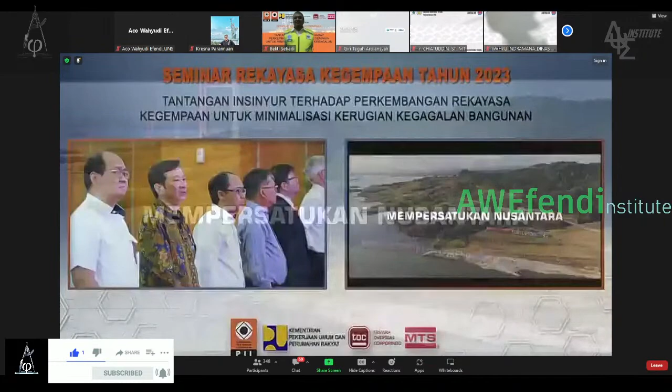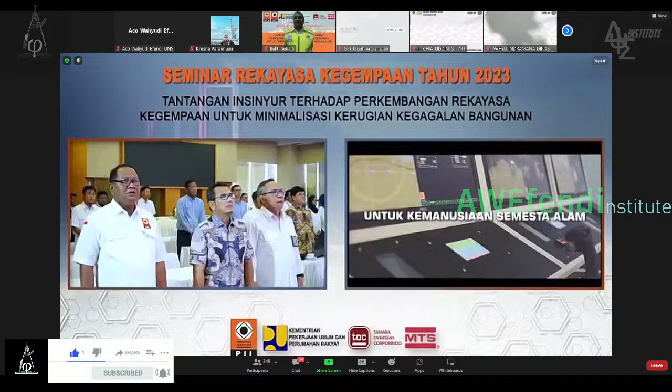Kami Insinyur Indonesia berbudi luhur dan berintegritas, kompeten dan profesional, bertanggung jawab sepenuh hati. Kami Insinyur Indonesia, kami menerangi negeri, mempersatukan Nusantara, membuka cakrawala dunia. Kami Insinyur Indonesia, kami memajukan bangsa, mensejahterakan masyarakat untuk kemanusiaan semesta alam. Kami Insinyur Indonesia, siap membangun bangsa.

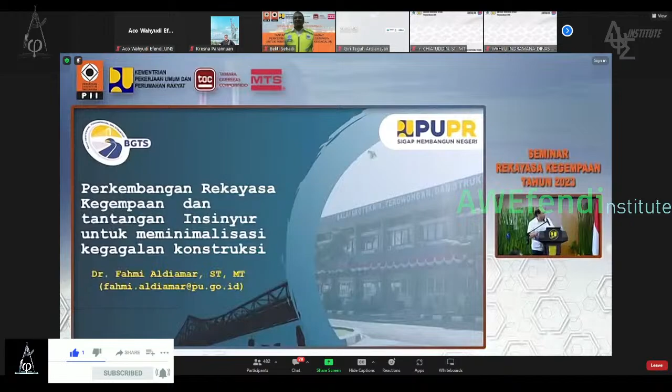Baik, yang ingin saya sampaikan di sini adalah lingkup-lingkup terkait dengan kegempaan, tantangan kita ke depan, dan standar ataupun pedoman yang sudah kita miliki sebagai panduan bagi rekan-rekan semua, terutama di keinsinyuran, dengan harapan bahwa dengan meningkatnya kapasitas ataupun kemampuan SDM kita, otomatis bangunan ataupun infrastruktur kita juga akan lebih handal.

Baik, Bapak Ibu sekalian, ini adalah hal yang sudah menjadi pertimbangan kita semua. Dalam artian pada saat kita bicara kegempaan, maka kondisi alam ini yang harus kita hadapi. Jadi kondisi tektonik kita di sini cukup kompleks. Secara umum ada 4 lempeng yang bergerak dan masing-masing memiliki laju pergerakan yang cukup tinggi. Apabila kita lihat di Indo-Australia, lempeng itu menunjam ke arah lempeng Sunda kurang lebih 6 cm per tahun.

Jadi akan ada akumulasi energi setiap tahunnya akibat pergerakan tersebut, dan suatu ketika apabila energi itu terlepas maka gempa itu akan terjadi. Ini adalah lempeng-lempeng utama yang ada di sekitar Indonesia yang juga mewarnai kondisi kegempaan di kita. Dan apabila kita lihat, ini adalah data-data kejadian gempa sebarannya di seluruh Indonesia. Jadi kalau kita lihat, hampir seluruh pulau yang ada di Indonesia ini tertutupi oleh data kejadian gempa.

Ini menunjukkan betapa kita harus sudah mulai berpikir bahwa infrastruktur kita harus lebih aware ataupun lebih tahan terhadap kegempaan tersebut. Kita harus mengantisipasi hal-hal yang sudah tidak mungkin lagi terelakkan. Jadi kegempaan ini adalah hal yang pasti terjadi. Kapan, kita tidak tahu, tetapi secara historis, 100 tahun ke belakang apabila kita plotkan datanya, seluruh kondisi yang ada di Indonesia ini tertutupi oleh kejadian gempa tersebut.

Apabila kita lihat juga, ini adalah data kejadian bencana yang ada di Indonesia dari tahun 2005 sampai 2014. Apabila kita lihat ke tahun 2023, ini juga akan meningkat. Jadi dominannya, 31% runtuhnya bangunan itu akibat bencana gempa bumi. Ini mungkin tadi sudah disampaikan oleh Bapak Staf Ahli Menteri bahwa memang betul kejadian gempanya tidak mungkin kita elakkan, tetapi bangunanlah yang akan menjadi penyebab terjadinya fatalities atau korban jiwa. Jadi kondisi struktur bangunan kita ini apabila tidak kita perbaiki, akan berdampak lebih lanjut terhadap kematian ataupun korban jiwa. Kemudian 5,2% kematian ini akibat dari bencana gempa bumi, baik itu dari tsunami ataupun bencana lainnya, terutama likuifaksi.

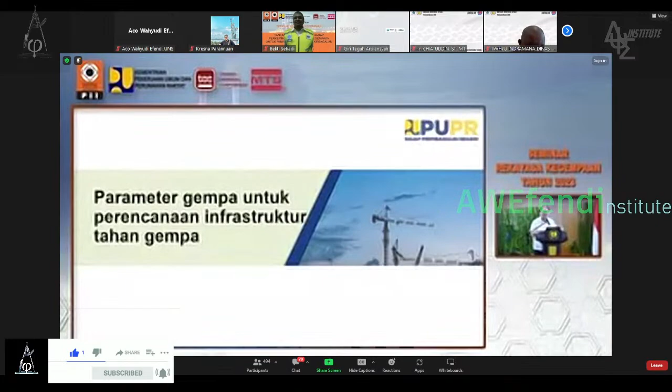Kemudian ini adalah lingkup yang ingin saya coba share. Jadi secara konseptual, apa yang ada di SNI, apa yang ada di standar yang sudah kita bakukan, ini kita harus mengetahui apa itu parameter gempa untuk kebutuhan perencanaan.

Kalau kita lihat kegempaan ini, kita sudah tahu pasti akan terjadi, tapi kita belum tahu di mana dan berapa besarannya. Jadi kita belum bisa melakukan forecasting. Mungkin di luar negeri pun belum bisa melakukan sedetail atau seefektif itu, sehingga kita sudah sama-sama meyakini bahwa kejadian gempa ini tidak dapat dicegah.

Sehingga kalau kita bicara bahwa fatalities harus kita kurangi, manusia harus kita lindungi, ini mengacu pada FEMA, kita harus mengidentifikasi sumber gempanya. Ini sudah dilakukan oleh Pusat Studi Gempa Nasional, sudah kita coba petakan di mana sesar-sesar aktif yang ada di Indonesia, contohnya seperti di San Andreas, harus dipetakan dengan persis di mana posisi sesar aktifnya, kemudian dibuat perambuan dengan tujuan jangan sampai kita membangun infrastruktur di daerah yang berpotensi mengakibatkan kerusakan, baik itu bangunan maupun korban jiwa.

Kemudian tsunami ini adalah bagian dari efek gempa, otomatis kita juga harus bisa memetakan zona mana saja yang rawan terhadap tsunami. Kita tidak membolehkan adanya bangunan di situ, atau kita harus mengantisipasi dengan bangunan-bangunan yang bisa menahan terjadinya tsunami atau mereduksi dampak akibat tsunami tersebut.

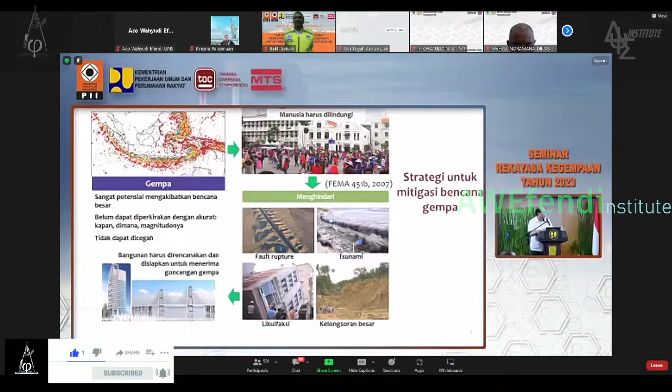Nah, ini yang menjadi dasar mengapa kita harus membuat bangunan kita tahan terhadap goyangan gempa.

Kemudian kalau kita lihat di sini, ada beberapa kondisi di mana terjadi kerusakan pada bangunan, terjadi kelongsoran, dan likuifaksi.

Jadi pada prinsipnya, kalau kita lihat di sini ada suatu nilai parameter kegempaan, yaitu percepatan gempa yang memang harus diantisipasi pada perencanaan infrastruktur ataupun bangunan gedung yang ada di Indonesia.

Nah, ini biasanya kita mengkorelasikan dengan nilai A atau percepatan, mengacu pada hukum Newton kedua. Nilai-nilai percepatan ini sangat tergantung dari infrastruktur yang nanti akan kita desain.

Jadi kalau kita bicara bangunan gedung, ini terkait dengan tinggi dari bangunannya. Kemudian terkait dengan tanah, apabila kita bicara kelongsoran, ini sangat terkait dengan massa tanah yang nanti akan mengalami pergerakan. Dan apabila kita bicara kondisi likuifaksi, itu tergantung dari kondisi lapisan pasir jenuh air yang dapat memicu terjadinya tekanan uplift akibat potensi likuifaksi yang terjadi.

Kemudian ini juga isu lainnya terkait amplifikasi, Bapak Ibu sekalian, di daerah cekungan, terutama di daerah perkotaan yang cukup padat penduduknya. Contohnya mungkin nanti akan saya sampaikan di Meksiko, terjadi peningkatan faktor percepatan dari batuan dasar ke permukaan yang cukup besar. Yang awalnya kita mengira gempanya kecil, mungkin hanya skala Richter 6 atau 7, di permukaan bisa teramplifikasi lebih besar sehingga dampaknya ke bangunan pun bisa mengalami keruntuhan.

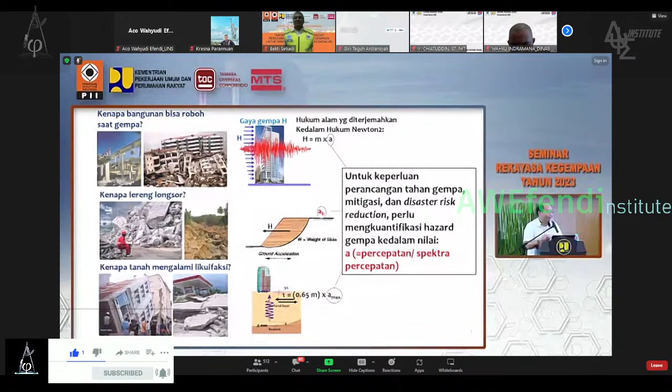Nanti akan disinkronkan dengan standar kita terkait gempa, baik untuk jembatan, bangunan gedung, maupun bendungan, dengan harapan bahwa seluruh peta yang nanti akan digunakan sinkron terhadap desain dari struktur bangunan yang akan kita bangun.

Kemudian untuk jembatan sendiri ada suatu hal yang signifikan. Yang pertama, ada seismic demand yang meningkat. Jadi yang awalnya umur rencana 50 tahun menjadi 75 tahun, sehingga otomatis dari segi kekuatan bangunan pun akan lebih tinggi dibandingkan dengan bangunan sebelumnya.

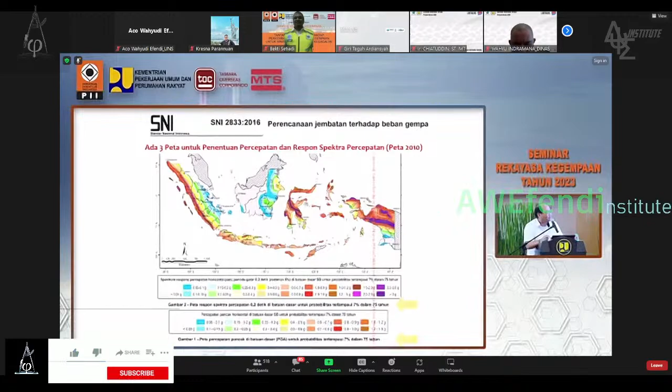Nah, ini adalah salah satu contoh peta-peta yang sudah dihasilkan, yaitu peta sumber gempa dan peta kegempaan, terutama yang dikeluarkan di tahun 2010. Di sini adalah yang untuk batuan dasar, kemudian di 0,2 detik, dan satu lagi di 1 detik.

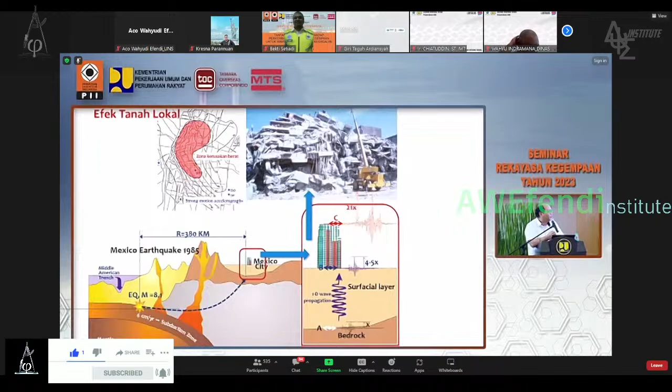Ini juga sudah kita coba antisipasi di dalam standar kita. Jadi apabila kita memiliki suatu nilai percepatan di batuan dasar, nah ini akan ada suatu faktor yang kita kalikan dengan faktor percepatan di batuan dasar, sehingga pada saat kita mendapatkan spektra desain di permukaan, ada faktor pengali untuk kebutuhan keamanan kita dari segi bangunan ataupun infrastruktur jalan dan jembatan.

Tujuannya adalah apabila kita melihat bahwa kondisi tanahnya adalah kondisi tanah yang khusus, maka faktor amplifikasi itu akan memberikan nilai margin keamanan supaya struktur atau infrastruktur kita akan lebih handal atau lebih aman.

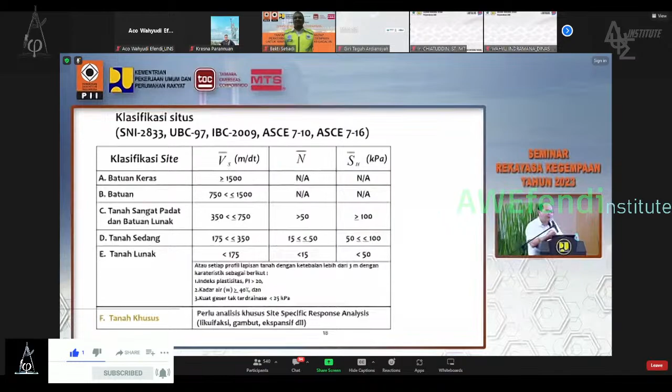Ini adalah kriterianya Bapak Ibu sekalian. Jadi kalau kita lihat ada kategori di mana kita bisa menentukan apakah itu kategorinya adalah tanah lunak, tanah sedang, ataupun batuan. Ini didasarkan dari hasil penyelidikan lapangan atau penyelidikan tanah, dan di situ kita bisa menentukan apakah kategori yang kita hadapi adalah kategori khusus atau tidak. Kalau kategori khusus, maka kita harus melakukan suatu analisis khusus supaya bangunan kita akan lebih aman.

Ini adalah salah satu contoh Bapak Ibu sekalian di Jembatan Kretek. Jadi apabila Bapak Ibu sempat mengunjungi ke sana, di sana sudah dipetakan ada sesar opak yang berada di daerah abutmen jembatan. Jadi di situ sudah diantisipasi kalau terjadi gempa di kemudian hari akibat gempa dari sesar opak, dimungkinkan ada kerusakan tetapi tidak sampai mengakibatkan putusnya ataupun terhentinya fungsional dari jembatan tersebut.

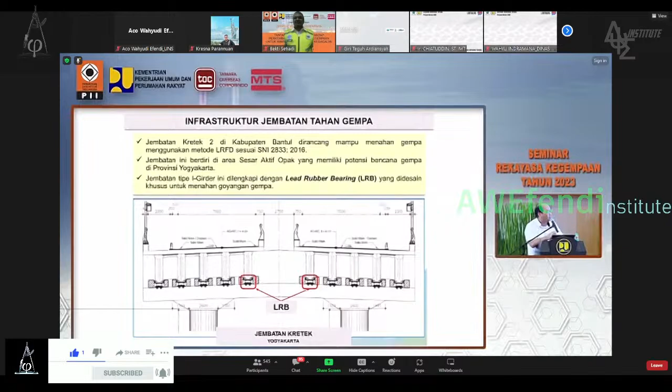Selain itu juga di bagian perletakan ini juga ada penggunaan isolation seismik, tim pergunakan LRB. Jadi jembatan ini sudah mengacu pada SNI 2833 2016 dan memang sudah ada penahan tambahan berupa isolasi seismik yaitu LRB. Ini mungkin sebagai gambaran Bapak Ibu sekalian bahwa LRB ini secara visual kurang lebih seperti ini.

Jadi ada karet di bagian dalam yang kemudian ada lead core-nya, ini berupa inti timbal. Tujuannya adalah pada saat dia mengalami goyangan gempa terhadap horizontal, maka timbal ini akan mengalami panas sehingga dia akan mencair. Pada saat dia mengalami goyangan, dia akan memiliki kelenturan, mengikuti gaya gempanya. Kemudian pada saat goyangan gempanya sudah selesai, dia akan kembali ke posisi semula dan timbalnya akan mendingin kembali atau menjadi keras kembali. Harapannya adalah pada saat ada goyangan gempa itu akan direduksi oleh LRB ini.

Kemudian sebagai informasi juga bahwa LRB ini sudah diproduksi lokal, jadi dimungkinkan untuk digunakan dan alat ujinya pun sudah ada di Indonesia.

Secara konseptual, apabila kita bicara pembangunan jembatan dengan pilar yang cukup tinggi, maka beban gempa ini bisa mengakibatkan terjadinya suatu goyangan kedua arah, bolak-balik atau cyclic pada struktur, yang apabila struktur tersebut tidak cukup kuat, maka akan mengalami kerusakan, retakan, dan mengakibatkan terjadinya keruntuhan.

Apabila kita menggunakan seismic isolation, maka goyangan gempa itu akan direduksi sehingga hanya bagian struktur atasnya saja yang bergoyang, tetapi tidak mengalami kerusakan pada bagian struktur kolomnya.

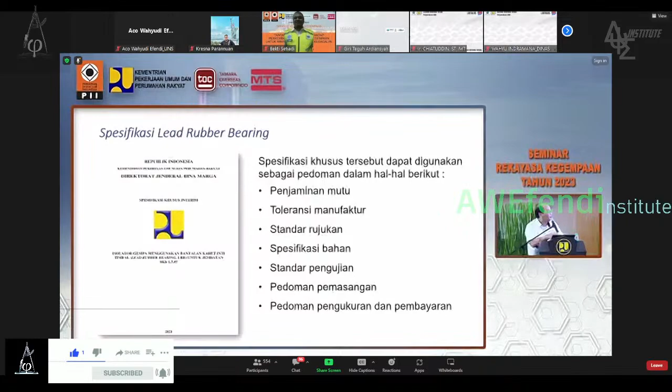Ini adalah akhir dari sesi yang saya coba tayangkan. Jadi secara overall, kita sama-sama ketahui bahwa kita berada di kondisi yang rentan terhadap beban gempa, sehingga mau tidak mau kita harus membuat suatu kategori di mana struktur kita akan lebih tahan terhadap gempa. Salah satunya adalah dengan pembuatan standar ataupun pedoman ataupun spesifikasi teknis.

Kemudian yang menjadi kunci adalah tantangan bagi kita semua, bagaimana caranya kita supaya keep up atau mengikuti aturan-aturan yang terbaru. Jadi jangan sampai kita tertinggal sehingga apa yang seharusnya kita antisipasi ini terlewatkan. Ini demikian yang bisa saya sampaikan. Terima kasih atas perhatiannya. Assalamualaikum warahmatullahi wabarakatuh.

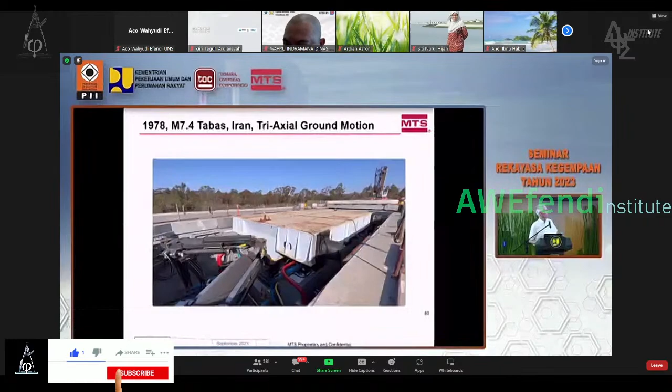This is now in 6 degrees of freedom of motion for that table. The Tabas earthquake. This is in San Diego, which is, the temperature is usually really nice, not too much rain - although they did just have a hurricane.

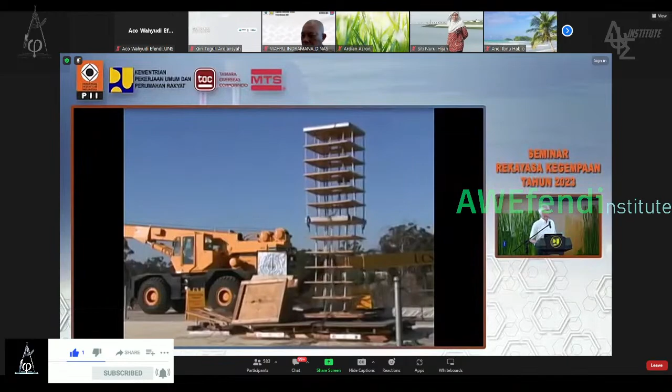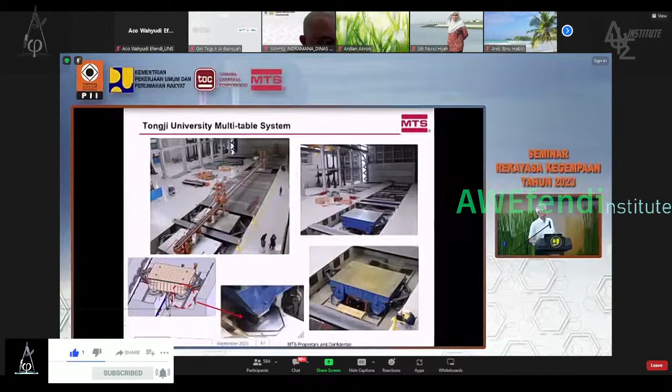See that big strong wall right next to it? They mount actuators on that and then can press against a specimen while a shake table is running. So they get testing coming from 2 different places.

Here's an electrical component manufacturer in Suzhou, China. They have 2 4x4 tables, and on the right is when they're joined together to make one larger table. This is used for component testing for nuclear power plants. As you can see, this one has 6-ton capacity up to 7 Gs, and it's used for testing the AP1000 equipment, which is the Westinghouse nuclear power plant design. And the Chinese have the similar thing called the CAP1000.

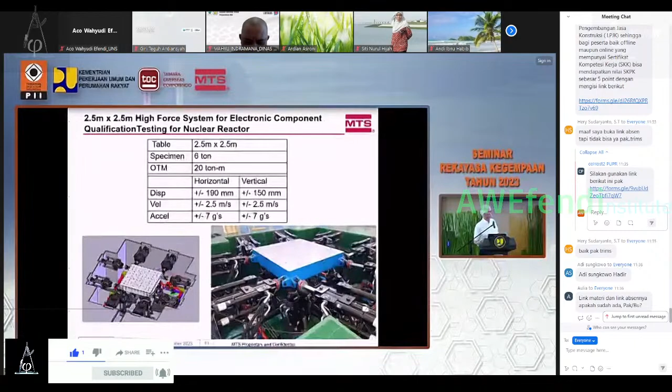This is a system also at Busan for doing nuclear power plant testing. As you know, Korea is providing nuclear power plants, especially in the Middle East right now. And this one has had similar kind of performance on it.

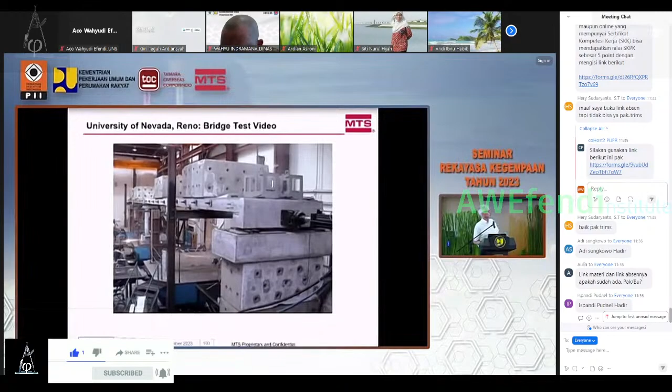This is at the University of Nevada, Reno. They have 4 tables testing a bridge. They have structural actuators at the end of the bridge that give the bridge abutment test. This is a system where they hooked up 4 tables and wanted to test the Northridge earthquake against a bridge.

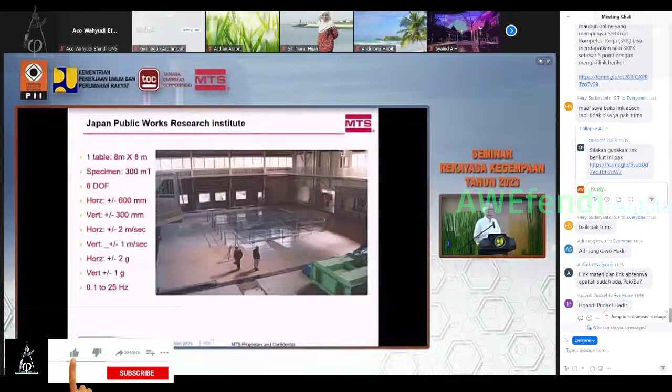Public Works Research Institute in Japan we talked about. Let's go through this really fast. That's the hydraulic power units. Those are the accumulators. These are hoses from the reaction mass to the facility floor. It's a floating foundation.

This table weighs about 100 ton, and they can put a 300-ton specimen on top of it.

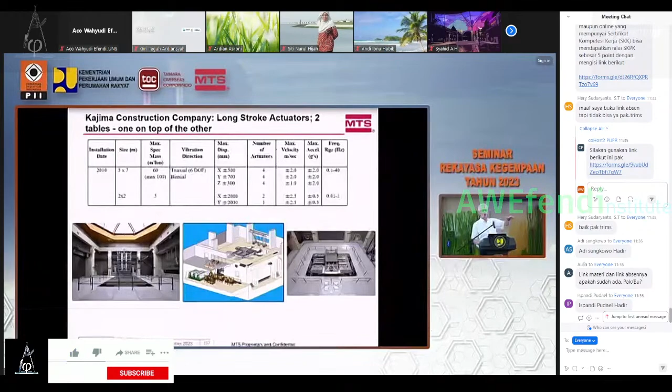This is at a construction company called Kajima in Japan. They have 2 tables. One is 5 by 7. The other one is 2 meter by 2 meter, which is for low frequency. And they can put the lower frequency test on top of the other table. This is what the distribution system looks like for that.

There, on the right, you see that guy. He's about 1.8 meters, maybe. And that's the vertical actuator, to give you an idea about the size of the actuators. Here's that little table moving. It's like a 2 hertz sort of system.

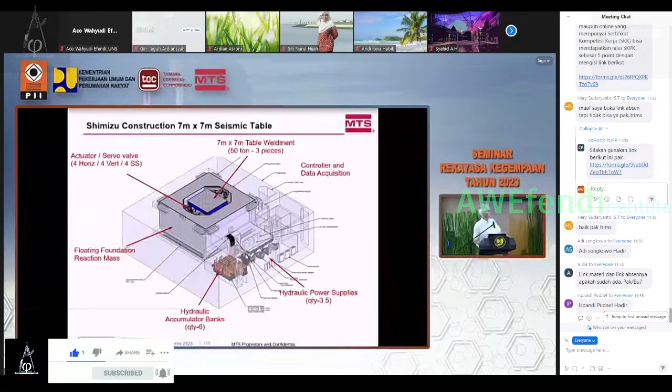This is another construction company in Japan called Shimizu. This is the pump room. HPUs on the left, accumulators back on the right, of the hard line running out to the system.

I'll show you the test specimen that they had for this system. Quite a clever design. This is from a news company over there. That's what they gave as their test specimen for acceptance.

Japan's really advanced in their research with earthquakes. This is the biggest system in the world at E-Defense.

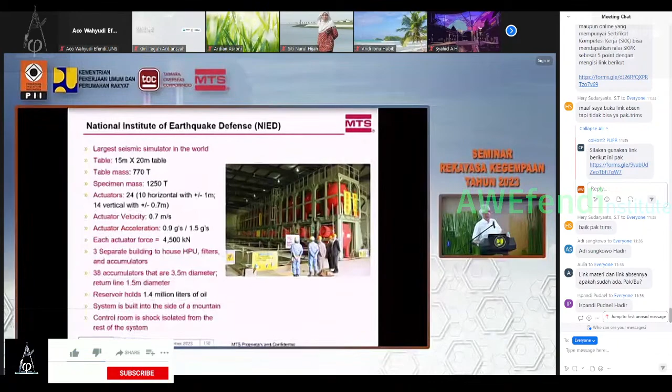I think they have 24 actuators. Each of the horizontal actuators have 3 10,000 liter per minute servo valves. So each horizontal actuator is getting 30,000 liters per minute, and there's 10 of them, so there's 300,000 liters per minute of oil going to just the horizontal actuators, to give you the idea about the required hydraulic power for the system.

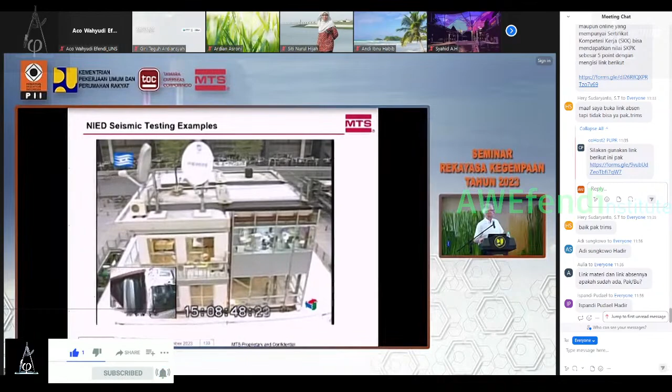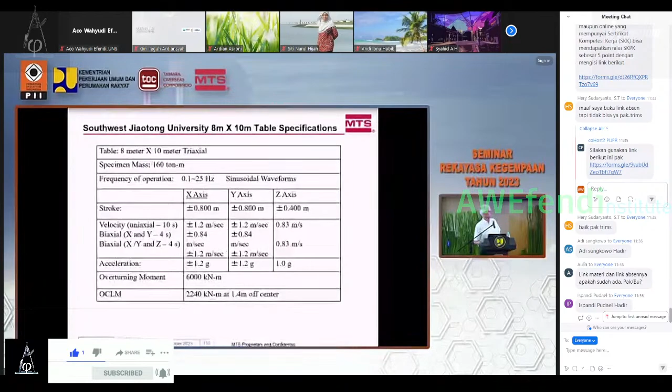I have to be done by about noon, so I'm going to really go fast here because I want to show you some of the stuff on applications. The table here, 105 ton, done in 3 pieces and then welded and bolted together on site.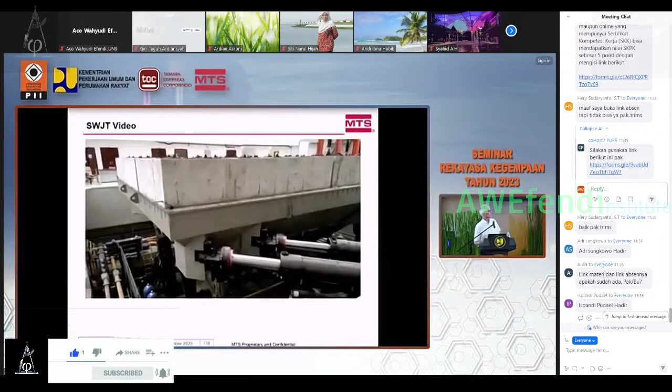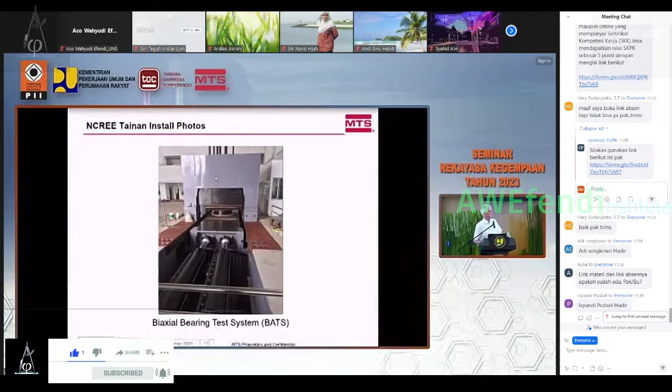This is plus or minus a meter in displacement for the system, for the 8 meter by 8 meter table, 400 vertically. There's the isolation bearing system, biaxial bearing test system. They call it BATS.

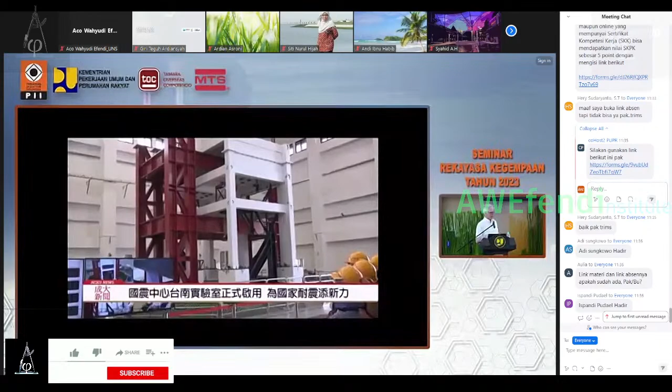The Prime Minister came and got a demo. And this is for their grand opening. Take a quick look at this. This has 60 meganewtons of vertical force.

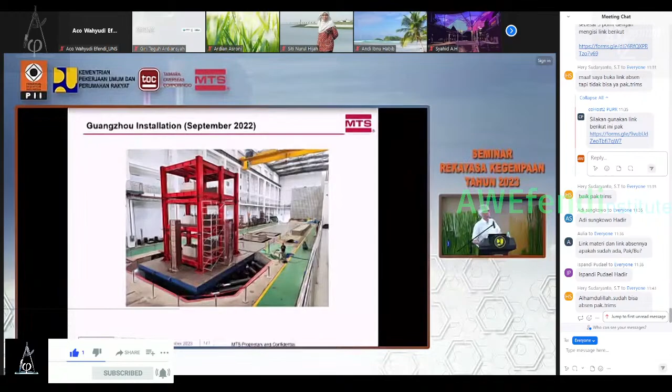So this now is something we're working on right now, and it's really special. This is the biggest system, will be the biggest system in the world. This is for Tianjin University. It's called the National Facility for Earthquake Engineering. Started in 2017, and we think we'll get it done in 2024. So I'll go through this a little bit fast. This is the lab that they want to have.

The comparison here to E-Defense: similar displacements, more velocity in Japan, but more acceleration in China, and more specimen capacity in China, 1,350 ton versus 1,200 ton.

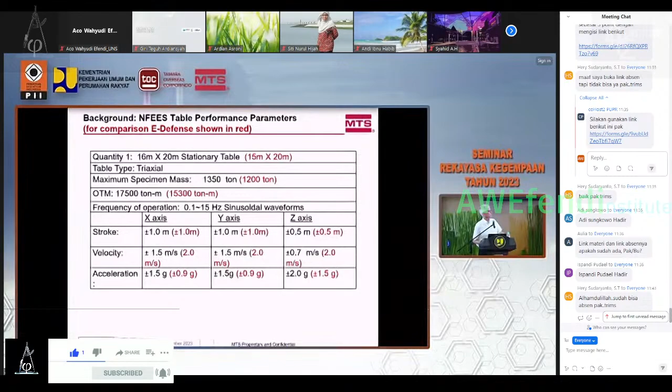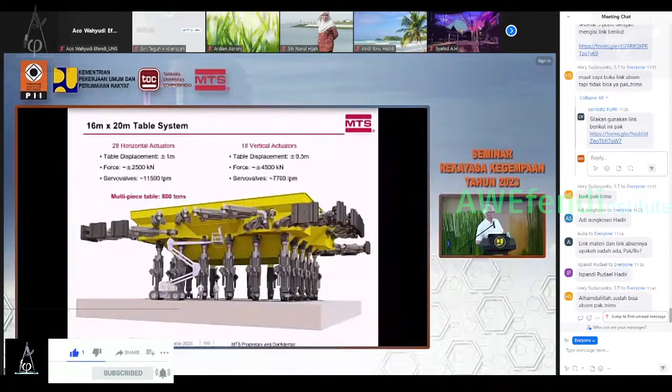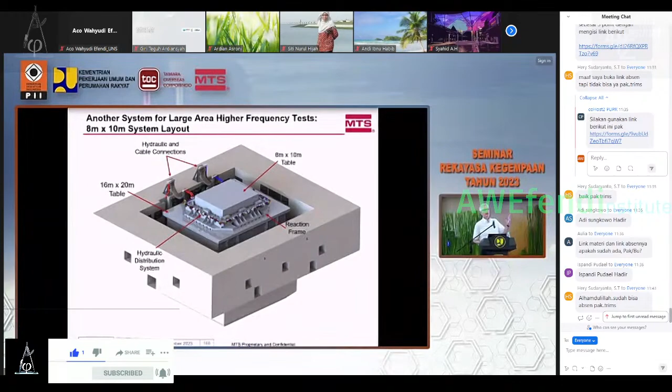This is the thing we talked about earlier about the scaling that they did. So this is the table that we put on top of it. It's an 8 meter by 10 meter table that will sit on top of the 16 by 20 table and lets them put a dam on top of it and gets them up to 50 hertz. And both tables can run at the same time.

So the table underneath can run at up to like 20 hertz, and then the table on top can run from 0.1 hertz up to 50 hertz, or we can frequency switch and let the higher frequency stuff happen only on the top table.

And that's what this system looks like. There's a big reaction frame there used for the actuator reaction. It's kind of the technology that's used for it. A pretty elaborate control system across these different systems, all interconnected to each other.

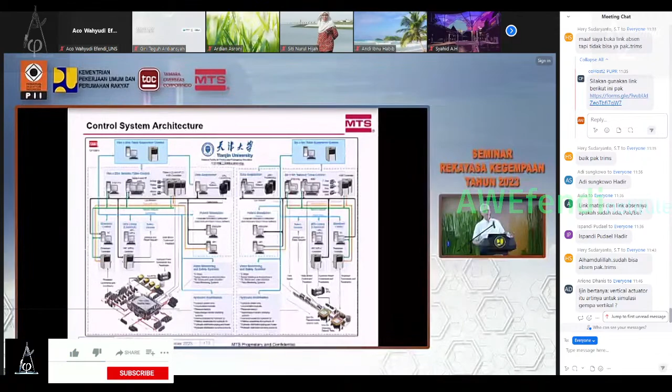And then here's some installation photos. This is the dream, this is where it was in 2021. Here's some installation construction photos.

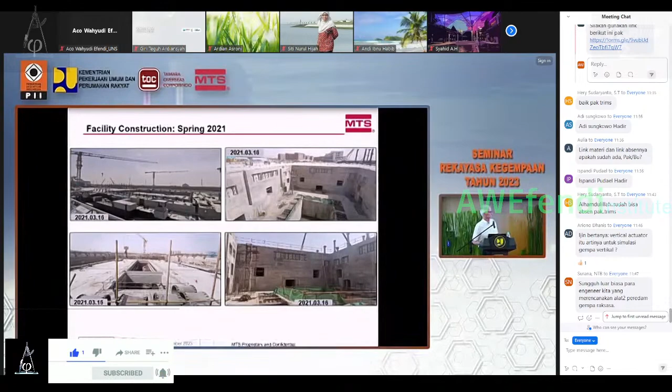Give you an idea about the amount of rebar. This is the area for the actuators for the 16 by 20 table on the right. And then on the left is a good view of what it looks like for the 16 by 20 and the other tables.

They have two 500-ton cranes.

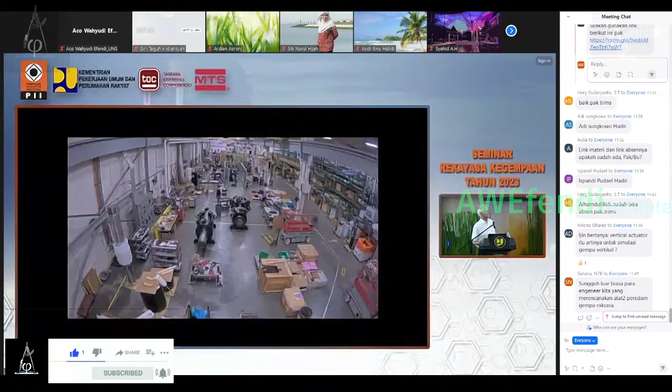This is all MTS design, by the way, and we work with a local manufacturer for the hydraulic power units and the few parts of the equipment. This is in MTS's factory, kind of a quick shot here about what it's like to make these. So we planned it out really well about getting from one end to the other end. Closest to us is for assembly, then it goes to pressure testing, then a place for checkout for its more rigorous testing.

Hello? Okay, I think that'll be better.

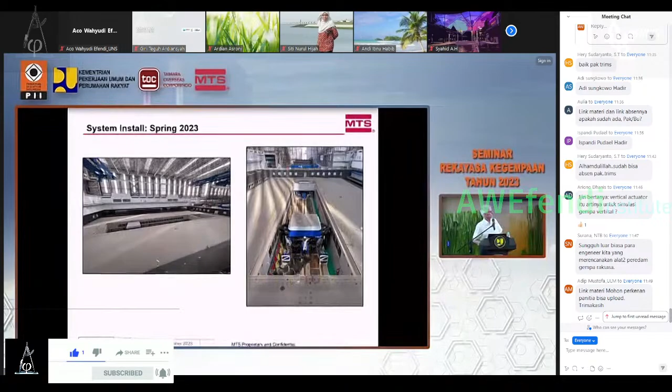Here's the 6x6 installation photos. This is spring this year. Here's the frame for the seal. And here's a couple weeks ago.

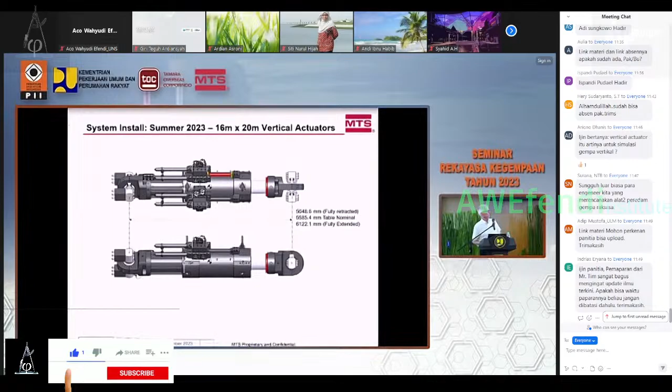And then these are for the big system, the vertical actuators. They weigh 23 ton, they're about 6 meters long when extended. The pit area here.

We don't have time for it, but here's what it looks like when they're all installed. So 18 of them in there.

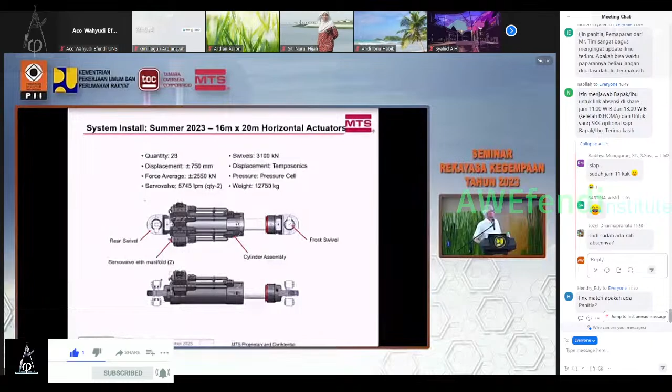And here's the horizontals that we have. These weigh 12.7 ton and are about 5.6 meters fully extended.

And we have 8 more to install for this big table. And then we will install the table, and we should hope to have everything installed by the end of this year.

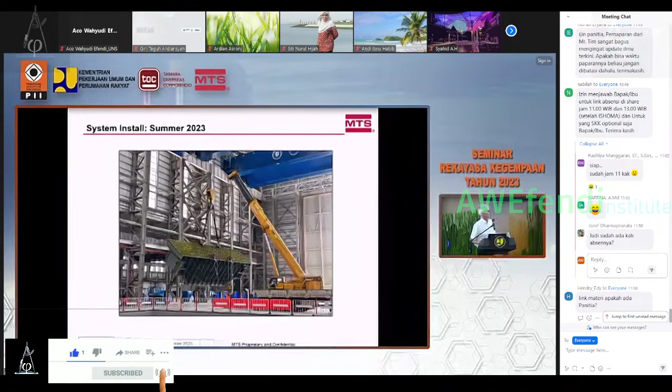And here's something about the table. This is the guy that runs this project over there from Tianjin University. So it comes in 6 pieces, and then they get, like I said, will be welded and bolted together. And this will be final machined on site, so they bring a CNC machine to the facility and finish the machining off then.

And so that, and I have 10 minutes, and I was going to try to show you some examples of some applications. So I'll do that quickly so we can have lunch.

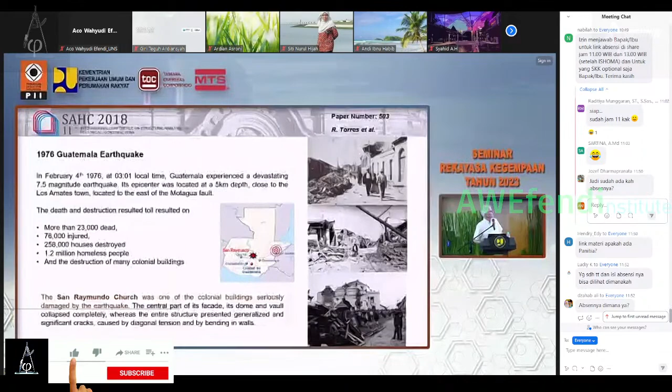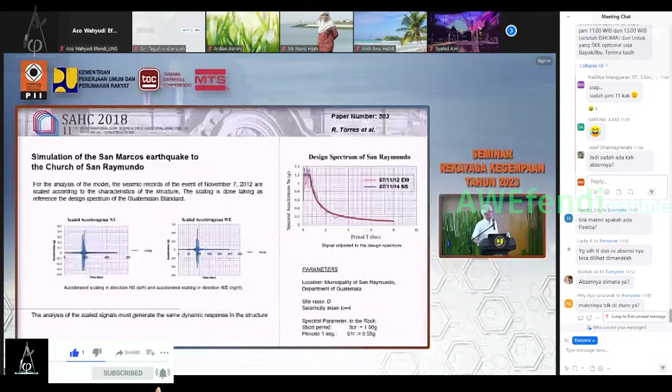They're subject to earthquakes in Guatemala. Earthquakes are bad. This is the earthquake they were interested in. Then it goes into how to model the church, our system that we put into it, the scaling they did, how they adjusted the earthquake time history to test it, and the techniques and skill involved in building the model.

These guys are almost like artisans when they do this work. It's really great. Then they instrument it. They have their mathematical model, and they're going to try to validate that model. The end story is they did a pretty good job modeling.

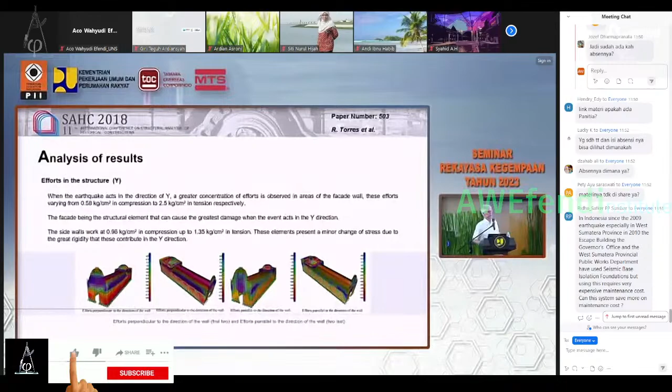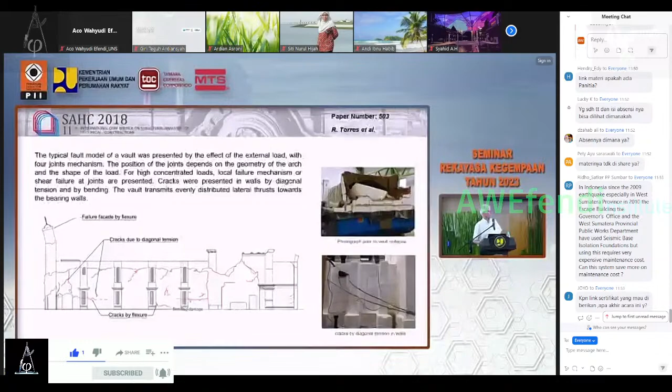Here we have some examples of the test. This was done on a 3 meter by 3 meter biaxial table. And this one, they wanted to break it. So then they study where all the cracks were and where the faults were. That's one application, an interesting use, and maybe some ideas for you.

Here's another one I think you'll be interested in. I heard about wood buildings earlier today. Purpose of the test, the researcher's overview.

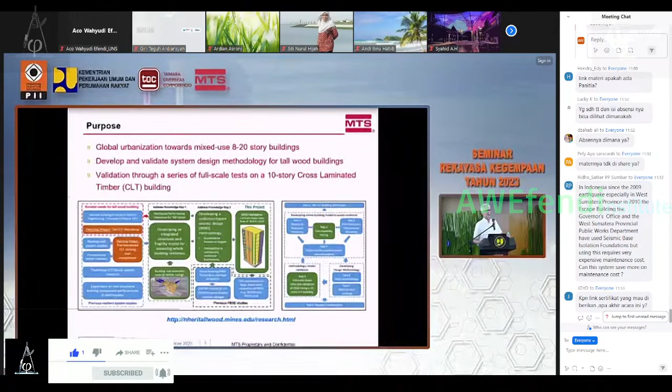In the US, a lot of funding for earthquakes comes from the National Science Foundation and the Department of Energy. They formed this big group, working on it for probably 10 years, to study wood building structures, and they wanted to build a full-scale test for a 10-story cross-laminated building. This chart shows the flow and their mental process on how they got to the final designs. Done in a scientific method, for sure.

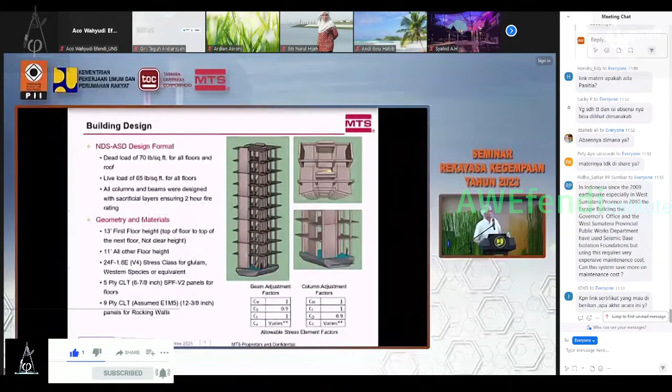Here's a view of the design. We don't have time to talk about this, and frankly I'm not a civil engineer, you guys would understand this a lot more. You can reference the paper for this, but it has a lot of the details. This is well documented because it's the government. There's a website where you can find a lot of things, which is where I took a lot of this information from. This shows where they've got the columns and what the grid structure looks like, and where they have the walls.

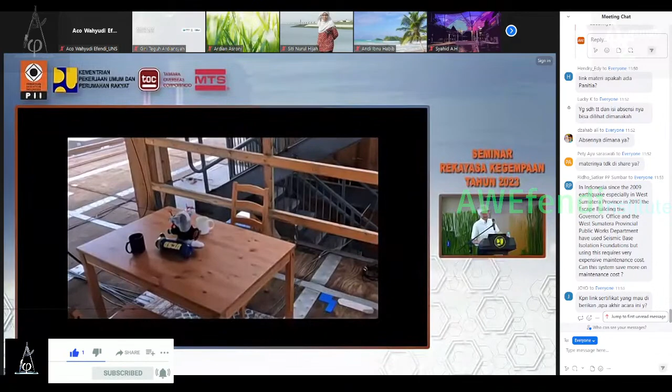They don't have any results yet printed. I tried to get some results, but they're still compiling them and they haven't released them yet.

The big red thing there is to protect the control building, which is the building on the left, where all the hydraulic power units and the control room are. They put that red structure there as something that would hopefully protect it in case it tips over. But when they run the test, the operators don't go in that building, they're way away from the system.

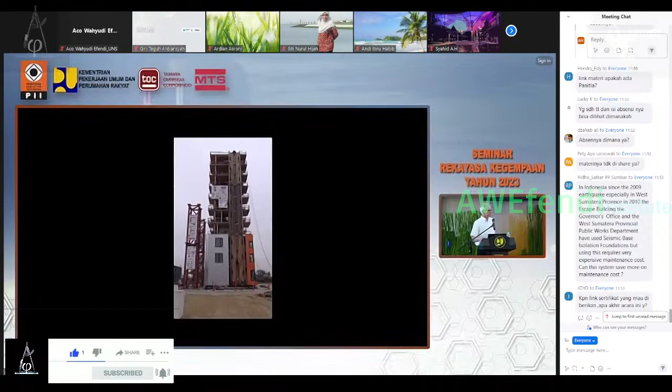So amazingly, we got to noon, and that was about it. I apologize if it was fast, but this is really exciting work that we do, and we really hope and look forward to being able to work with you. Something here maybe is interesting, and MTS would love to be a partner with you.

We're there in any capacity to answer questions, to collaborate on a proposal. A lot of times you have to get people together to come up with what you really want. These bigger jobs take many years to put together. It's collaboration internally with your research community, and coming to a supplier to figure out what can be done for what price, iterating on it, then selling to higher management within the government. We really understand that it takes a long time to come up with the funding required to build something like this, but they last for 30 years, so you want to do it right when you do it.

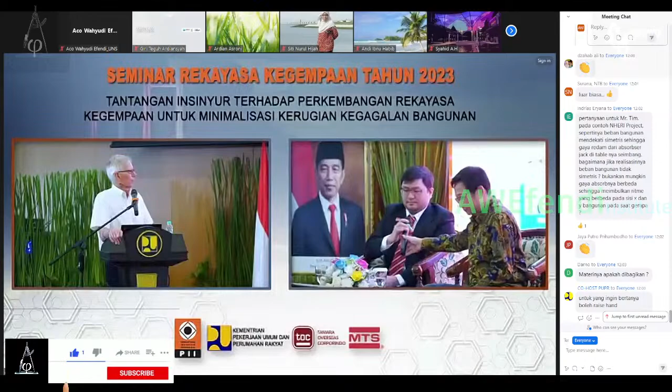So for the maintenance on the isolation bearings, the rubbers inside the isolation bearings will deteriorate throughout time. Normally we expect it has its life expectancy of 30 to 50 years, depending on how big it is and what kind of structures or buildings it's in.

Sometimes we design it so it can be replaced one by one, so you don't have to replace it all at one time. You can just replace like 20% of them in 5 years, and 20% of them in the next 5 years, and so on.

From my experience with isolation bearings installed in buildings in Taiwan, they would like to have more and more small-scale isolation bearings instead of one big one or a few big ones, just to save on maintenance cost and replacement cost.

But I will say that for government buildings or for schools, we want to design these buildings so that they will not collapse after a big earthquake. It will be damaged, it can be repaired, but it just will not collapse.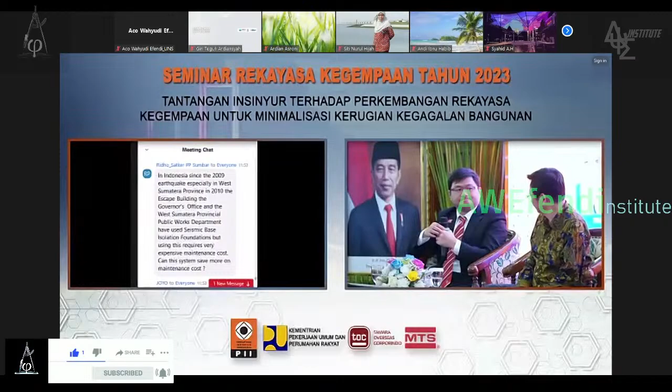Okay, I have a question. I have seen that you also produce an actuator, or dynamic actuator. Yep. Can we use this actuator, or static, also for the shaking table?

So if we have a table, and then we have an actuator, a dynamic actuator, and if we put this actuator on the table, is it possible?

Oh sure, yeah. You have to be careful, of course. You have to make sure that whatever your actuator is capable of, the table can't move beyond what the actuator is going to take, in terms of swivel angles, or you'll start to damage things.

The other thing is, on actuators there is a cushion built into the end caps. This cushion is designed to meet an appropriate mass and velocity, worst case. So this is the idea that it's the safety valve, safety function of the actuator.

So the rod that moves back and forth has a mass, and then whatever it is you're moving has a mass. And so the cushion for an actuator is designed for something specific, right? If you just take a structural actuator that has some dynamic capability and say, oh, I'm going to use it over here, you have to take care that what's over here isn't going to exceed the capacity of the cushions within the actuator.

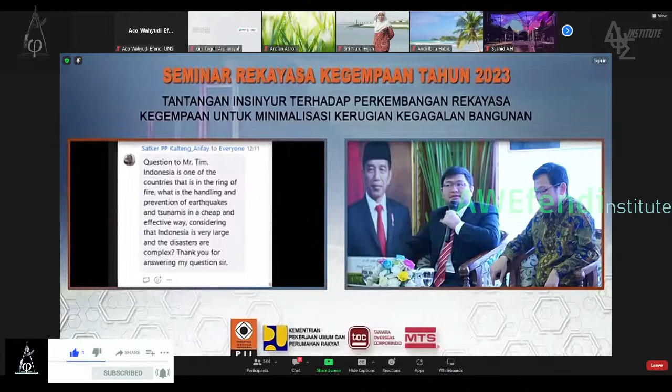For multi-hazard testing right now, I think it's a trend worldwide for researchers. We have a cooperation lab in New Zealand which will test fire hazards on concrete material. They set big fires on the concrete material, and after that move it to a structure testing lab to test the properties before and after the fire. I think the first research in this area is material-wise, so you don't test whole structures with multi-hazard combinations.

Because the hazards that come could be really large, like tsunamis. When we had the big tsunami in 2004, the earthquake in 2004, the tsunami was so big that you cannot prevent it, and you cannot create the right testing conditions for that. So the first thing is to study the materials and scale-down models, and then we start to improve our research on that.

We are also using more and more computational models. Of course, multi-hazard computational models can combine computational fluid dynamics with structural modeling. That helps us understand what kind of tests we need to do in the real world. After that, you can define what kind of tests you'd like to do in your laboratory and what results you want to get from these tests.